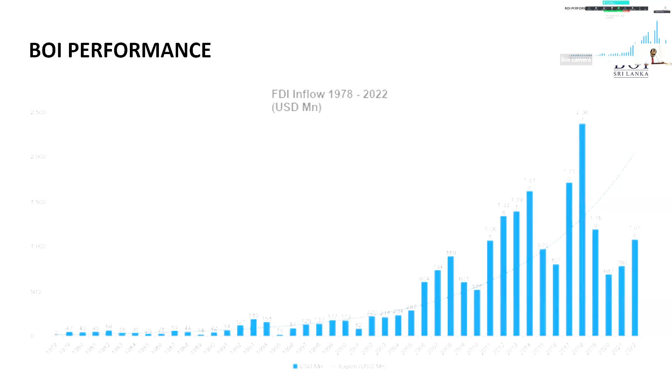You can see in 2018 only we had 2.3 billion USD. Why? Isn't that a miracle also? There was something special for that. That is the year we had this Hambantota HIP transaction with the Chinese government. So then we had 1.3 billion came in 1 year. Other than that, basically it's 1 billion USD investment inflow.

So then exports annually, about 2022, is 9.4 billion USD, and we are connected with many countries. Majority of our exports are textile, and from a country point of view, industrial exports are 89%, which are from BOI companies. So then we are doing really well, but still we can see majority is from textile and garments.

So then are we in a position to continue with the textile and garments? Because it's 5.5 billion of our total exports, we have to change a strategy. We have to see what are the opportunities that we can excel in, provincial wise, area wise, category wise, and market that to the export market. So that's what we are working on now.

The reason is automation has come up now. A lot of operations have been automated in zones, especially in Katunayaka and Biyagama, major zones. We don't have much employees there. Now these labor-intensive projects have been shifted to remote areas. A lot of garment industries we have in Vavuniya and other areas in the northern province, and also in the remote areas of the country.

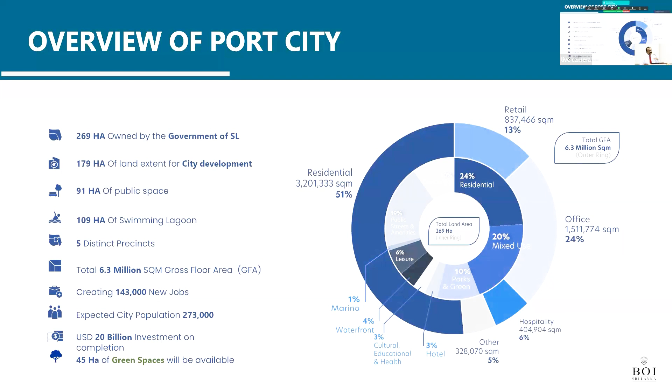A lot of projects are now in progress - 5-6 projects are in the pipeline, and 3 projects have started construction. This is how the area has been demarcated, with a total area of 269 hectares. I'm not going to talk about that too much because all the details are available on the web, but you can see whether you can connect your friends to this Port City area.

If we talk about the Northern Province, since our lady already explained the geographical information about this area, I don't want to repeat that, but let me emphasize one factor - the contribution to GDP. That's where we have to focus, Mr. Vijayaratnam, because if we take the contribution from Western province, it's 39.1% of GDP, but if you take Northern, it's just 4.7%. So that's the disparity. This is where we have to focus, see the opportunities and resources, and come up with our development plans together. Then we can reach at least 10-15% in a few years.

Like the Northwestern and Central provinces, if we can go up to at least 10%, that would be much better than what we have today. As the UDA team mentioned, we have a good network - electricity supply is good and communication is excellent. We know this because we've been at university with Jaffna Peninsula students, and they were highly skilled, dedicated people with good literacy and capacity for absorbing new technologies and capabilities. Rail transport isn't great, but we have connectivity, and harbors and airport facilities were also mentioned by UDA.

Every business aims to be leaders in their industry. Guidance by another leader makes the journey smoother. Setting trends is easy with the right infrastructure, and being in tune helps lead your business forward. Using cutting-edge technology keeps you ahead, and why not lead the pack? Lead the way with a way that's all connected. Transform your business with Dialog Enterprise. As the leading ICT provider for enterprises in Sri Lanka, we have the technology, expertise and island-wide presence that has made us leaders, and we can help you lead your industry to the future today. Dialog Enterprise.

For over 4 decades, we have been designing and building reliable construction solutions that a whole nation has grown to depend on. International Construction Consortium Private Limited has been innovating engineering solutions that have shaped the local construction industry for the better, to become more sustainable, efficient, and accessible. In Sri Lanka, where we're based, our name ICC stands for Solutions That Builders Can Trust.

With our latest innovation, prefabricated, pre-finished volumetric construction, PPVC technology, we're now set out to change the local construction industry forever by providing faster and finer construction for your building needs. Using PPVC will drastically reduce construction time, since the majority of the structure is produced at the factory.

The module production process can be done simultaneously at the factory with the construction of the foundation on site to get the maximum time benefit. Our team ensures that the modules are produced under controlled environment conditions to make sure that the final product complies with the best quality standards. This entire process improves the productivity of construction by 40% in terms of manpower and time saving, depending on the complexity of the project.

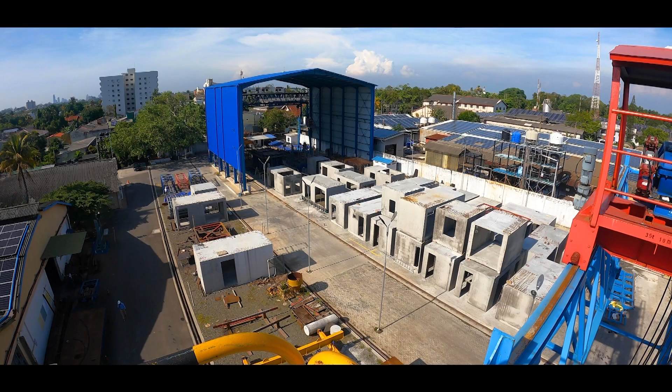Our modular building solutions are ideal for high-demand projects where scaling your labor and resources efficiently means everything. From apartments, executive accommodations, hospitals, and commercial buildings, whether major-scale or an intimate passion project, this modular solution by ICC wins you time.

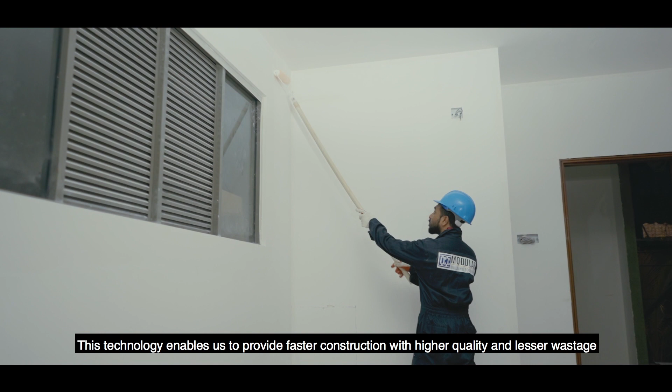ICC has been the innovative solution provider to the Sri Lankan construction industry, and we are very proud to be the only contractor to introduce this volumetric construction for the first time in the South Asian region. This technology enables us to provide faster construction with higher quality and lesser wastage.

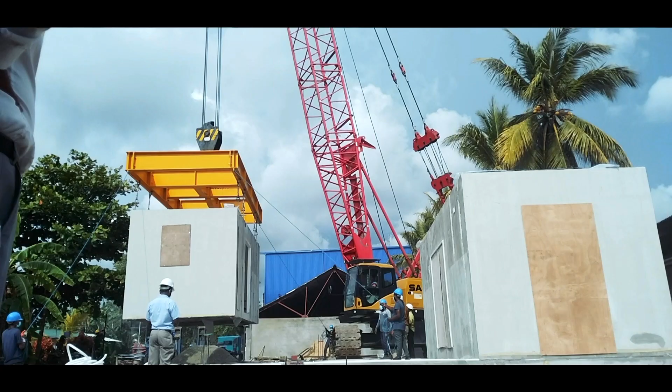Our intention is to introduce this technology to local as well as international markets, from which our clients will benefit in many ways. In this industry, where time means money and efficiency is the name of the game, ICC Modular Building Solutions gives you the confidence to move things forward, knowing that you can build mountains with only morsels of time.

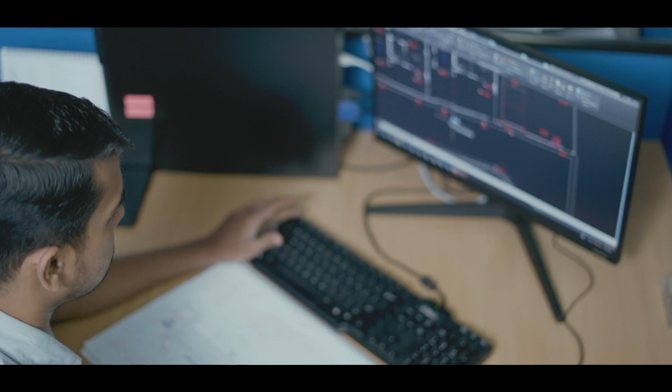I think ICC has made a bold and timely decision to introduce PPVC technology to the local construction industry. I have been involved with this project from its inception, especially with respect to selection of construction materials, evaluation of the structural performance and the construction process.

Extensive tests were carried out to evaluate the performance of the material and the entire construction process, including casting, finishing, transporting, placing and connecting the modules on site. I must congratulate ICC for the successful completion of the first ever modular building in Sri Lanka, in par with international standards, and I am confident that the introduction of PPVC technology will revolutionize the construction industry in Sri Lanka.

This solution is not just for Sri Lanka or even South Asia. For construction companies all over the world, working with ICC modular construction options gives access to durable, lightweight and easy-to-handle solutions for their next project.

Thinking modular is thinking efficient, it means thinking scale, and approaching construction with the sensitivities of time and labor of the business in mind. That's why we think it's the future of construction, and we can make it happen for you.

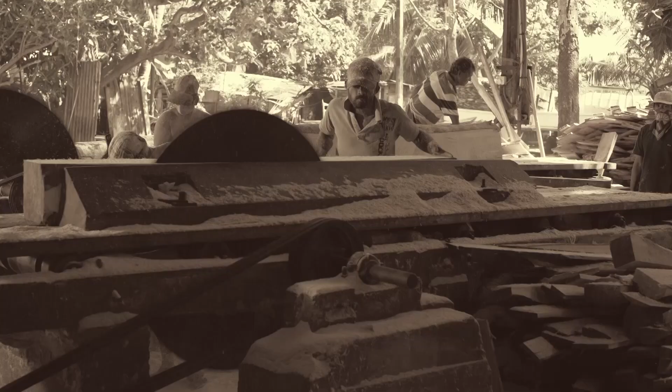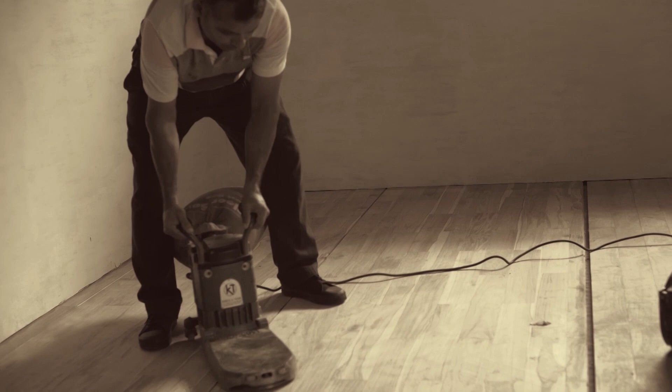In the past, installing timber floors involved sourcing wood, finding labor to treat the wood, and subsequently labor to install it. This was both a costly and time-consuming process. Today, that process has been revolutionized, resulting in a floor that is the highlight of your home and highly recommended by the experts.

The journey of these floors starts with us at the timber flooring facility in Bandaragama. Standing on 2 hectares of land, our factory, which consists of 3 buildings, a drying facility and a treatment plant, is changing the game by taking production of timber flooring systems in Sri Lanka to the next level.

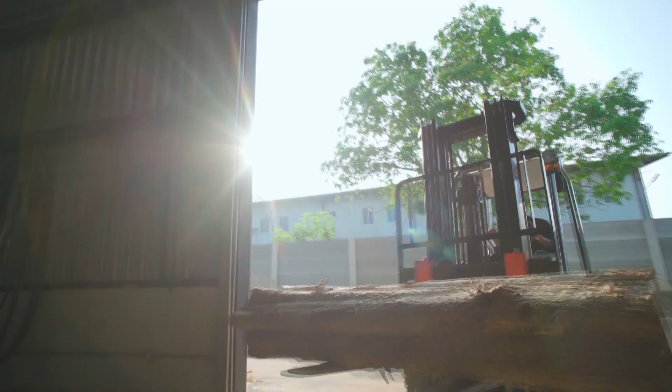The result is high-quality, standardized timber floors that are ideal for both local and international markets. Conforming to European standards, we create these fine floors with our state-of-the-art machines.

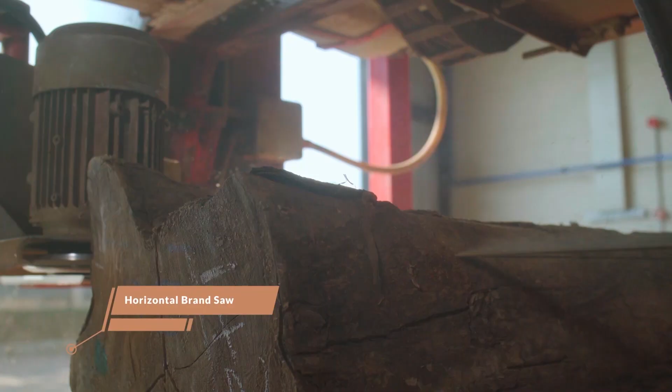Manufacturing begins with the primary process of sawing. The selected logs are sent through 4 specialized machines, which saw, edge, rip, and cross-cut the timber to the necessary size specifications. Next, within our treatment facility, chemical pressure impregnation treats the timber, ensuring it is resilient to termites.

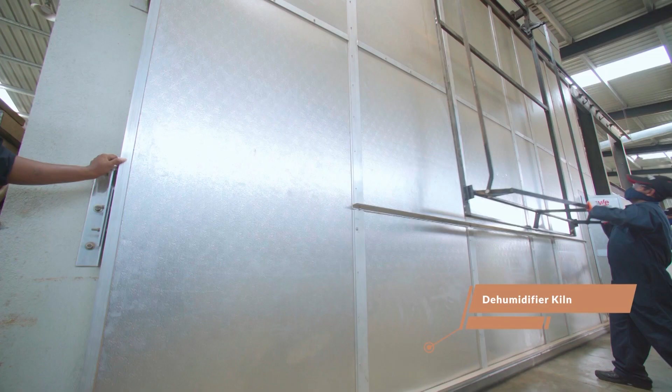Once the timber is treated, it is dried in an ultra-modern dehumidifying kiln that reduces the moisture of the wood between 8 and 12%.

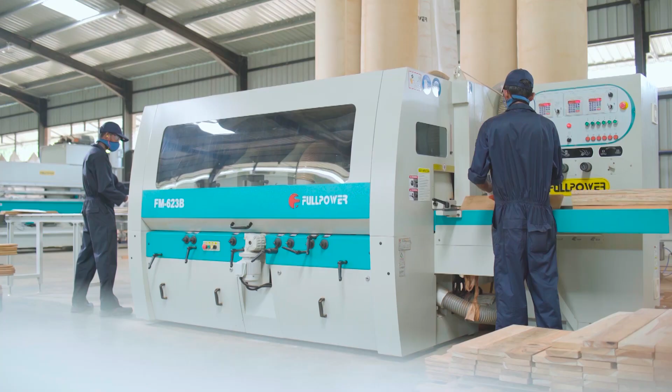The seasoned timber then moves onto our processing unit, where secondary sawing takes place. It is at this stage that planing, tongue and grooving, cross-cutting, tenoning and heavy-duty sanding occurs. At the finishing stage, the processed timber is sanded, cleaned, stain brushed, sealed and UV cured.

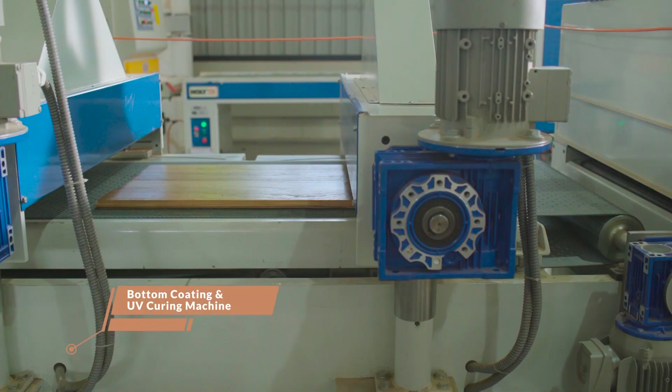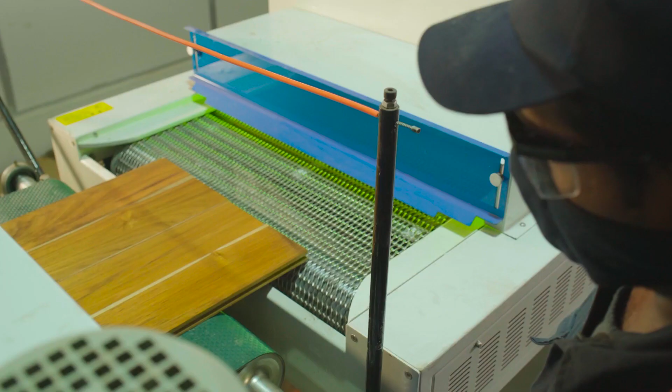The result is a floor plank with a finish of either gloss or matte, depending on your requirements, which is ready for immediate home installation.

Our product range consists of flooring made from locally sourced teak, paramara and kumbuk, as well as oak, pine and cypress imported from Europe. The quality of our product is of utmost importance to us, and we adhere to stringent quality controls at various stages of the manufacturing process.

Being mindful that our industry is dependent on the environment, we source our wood from the State Timber Corporation. We also take measures to replenish and safeguard our forests by setting aside land for the continuous growth of new trees, our raw materials in the future.

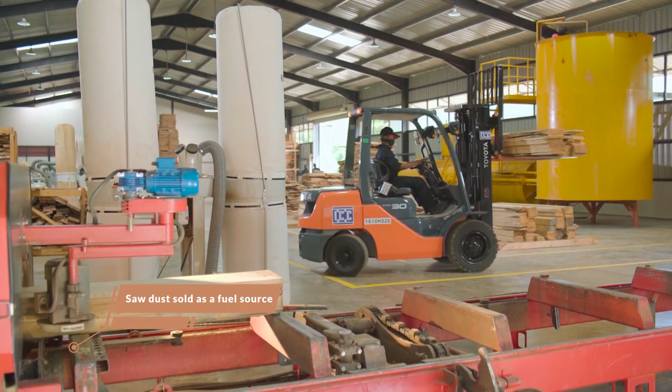In addition, we recycle our manufacturing waste materials and take measures to ensure pollution from our facility is at a minimum at all times. Our finished product is manufactured to make installation hassle-free.

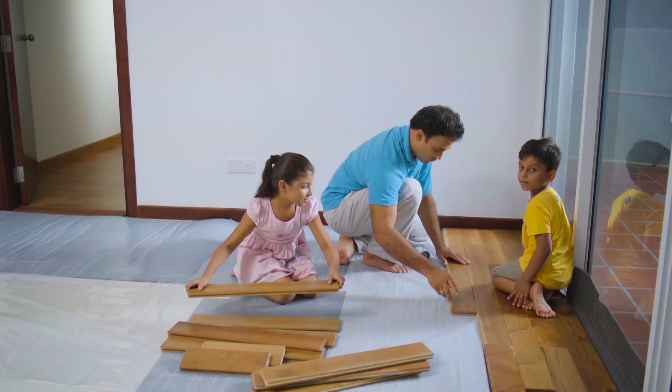We utilize the revolutionary Elastilon laying system, where the wood is pressed on an elastic adhesive, which makes installation simple. Our timber floors are available in a range of colors and are convenient to install, providing a ready-to-fix product from one company that architects can recommend with confidence and homeowners can appreciate for many years.

We are moving Sri Lanka's timber flooring industry to the next level with our timber flooring facility.

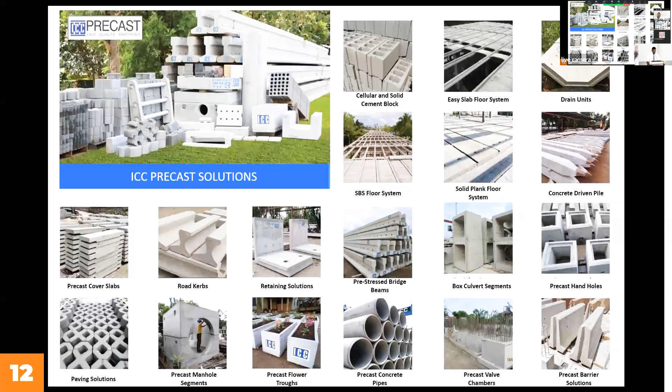Let us move into the precast background of ICC. In 1996, we started the manufacturing of precast elements, which are precast beams and columns. Those are still popular in the market.

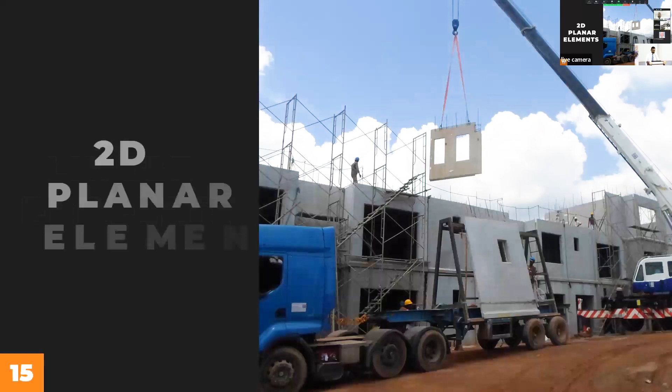In year 2000, we introduced another new technology to the industry: 2D planar elements, which are precast wall paneling systems, both load bearing and non-load bearing.

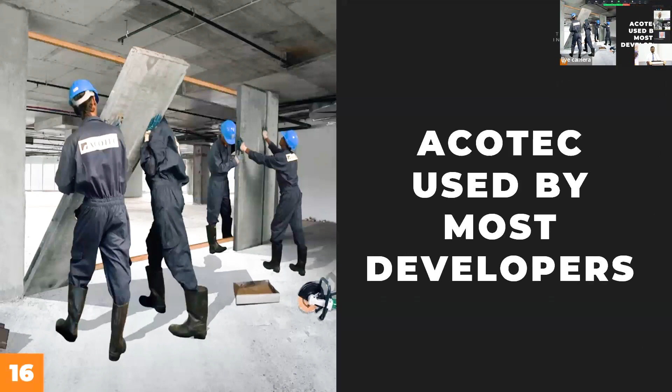In year 2015, we introduced another new innovation to the industry: one of the most popular 2D precast elements, the Acotec wall paneling system, which is preferred by most developers for their projects, especially in Colombo. Almost all the high-rise building contractors have used our 2D precast elements, the Acotec wall paneling system.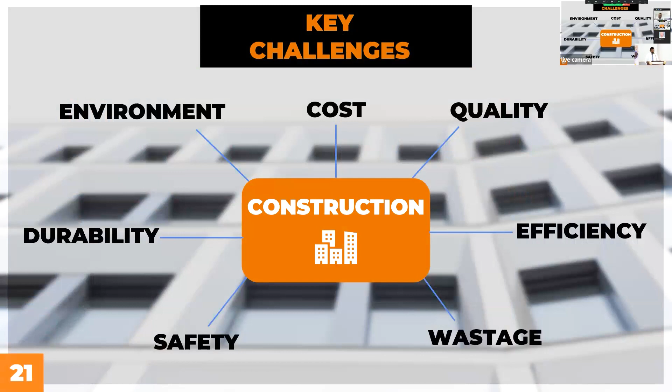In year 2021, we were able to introduce 3D modular building system for the Sri Lankan construction industry. During the COVID-19 pandemic, we had to re-evaluate our approach to various construction challenges as shown on the screen. As a result, we were determined that investing in cutting-edge technologies was the best solution to address these issues effectively.

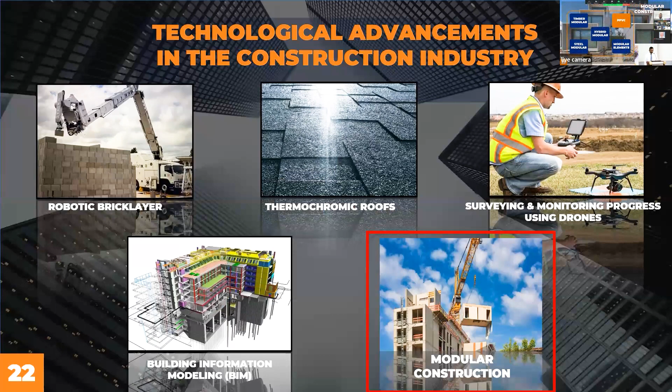After analyzing the current technology landscape, we decided to invest in modular construction technology as shown on the screen. There are several types of modular construction techniques in the world, but we selected PPVC technology as the most suitable modular construction methodology for the Sri Lankan context.

You may wonder what PPVC is. PPVC stands for prefabricated, pre-finished volumetric construction. Let us see the advantages and benefits of PPVC construction technology. You may be able to save up to 40% of the time, and you can see many more benefits on the screen.

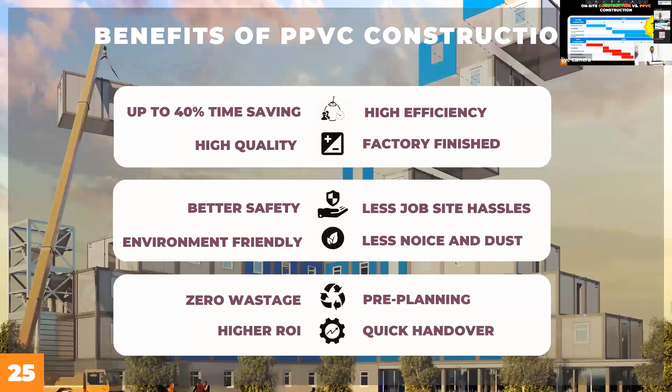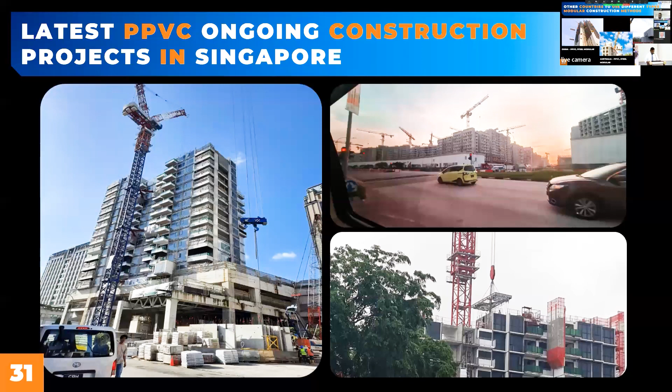You can see some ongoing projects in Singapore. Apart from Singapore, this PPVC technology is used in China, Australia, and South Korea. They were using this technology for their mega development projects.

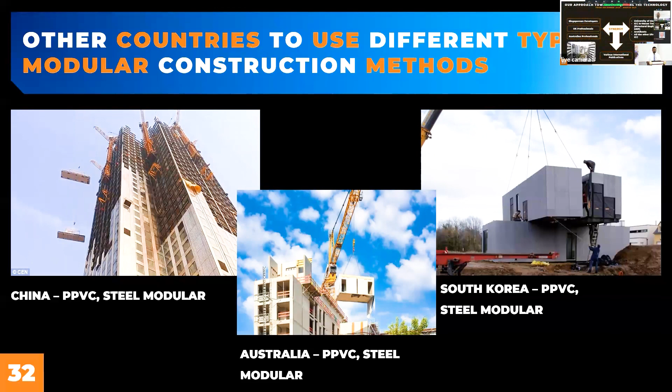During COVID-19, we had to work harder to acquire this technology due to travel bans and curfews preventing us from meeting professionals in other countries. But ICC's in-house team collaborated with professionals from Singapore, UK, and Australia online, and referred to international publications to transfer this technology to Sri Lanka successfully.

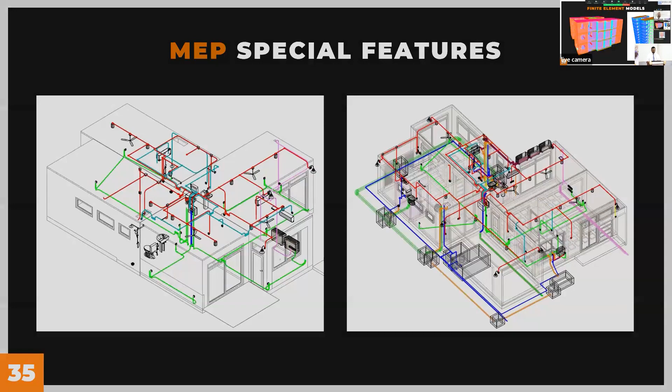The PPVC modules use software such as Revit in order to pre-plan all MEP services and fixtures. The structure is also modeled by means of finite element models to optimize the reinforcement requirements. The initial modular design by ICC was approved for a 14-story building by Dr. Chintaka Mallikarachchi, and reviewed and endorsed by Professor SMA Nanayakkara of University of Moratuwa.

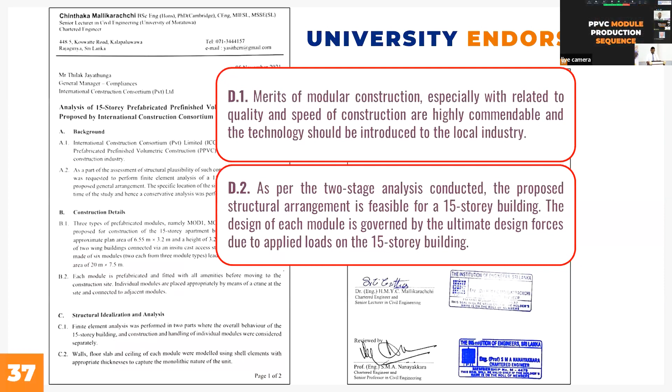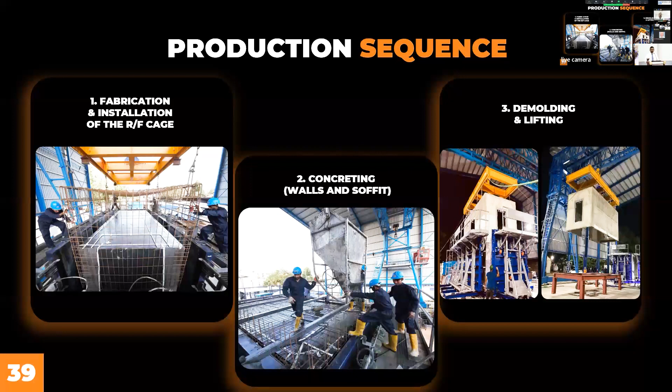Let us see the production sequence of PPVC modules. On the left side, you can see rebar fixing is going on. Once you complete the rebar fixing, you may do the concreting of 4 sides and the ceiling slab. Once you complete that, you may de-shutter after 24 hours, and it should be transferred for floor concreting.

Once you complete the floor, it should be transferred to the finishing yard. From there, you can do the finishing work, civil and mechanical, before transporting to the yard. Once you transport to the yard, it can be erected on completed foundations.

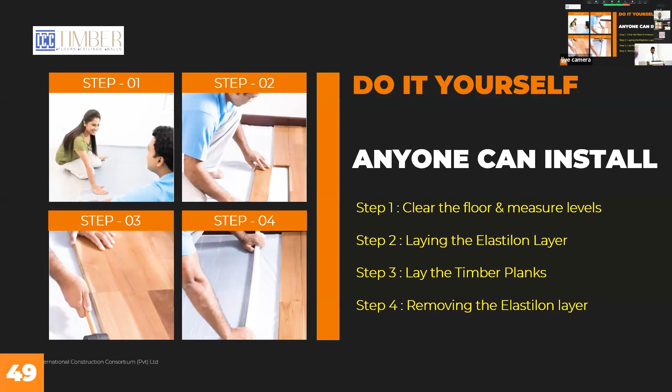Our next exploration is the ICC timber solution - this ICC pre-finished timber flooring. This flooring system can be installed by anybody; it does not require skilled labor, by adopting the 4 steps shown on the screen. Time-wise, this is 5 times faster than traditional and conventional timber flooring systems. It does not require any patterns, painting, or sanding.

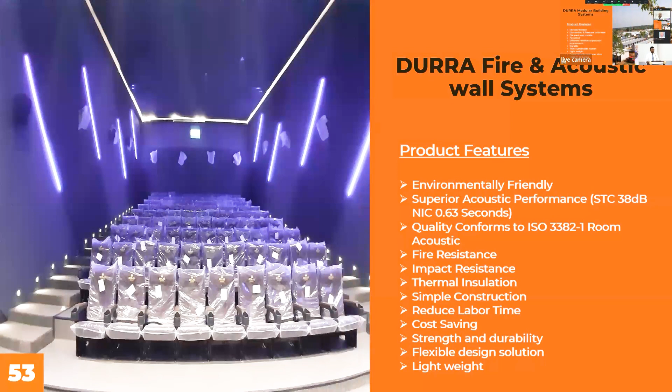This is the next exploration, called the ICC DURRA panel system. I think most of you may know about this one. It is a multi-purpose panel which can be used as a fire and acoustic paneling system. You can see some features on the screen. This can be used for modular building systems as well, and other building systems.

Ladies and gentlemen, as you know, the industry is very volatile and uncertain. Yet still, at ICC we remain committed to providing innovative solutions with competitive pricing. We offer products with high quality, and we are a financially sound company. Therefore, as introduced by UDA and BOI, you may join hands with us for your next development, use our products, and get more benefits and more profits by using our products.

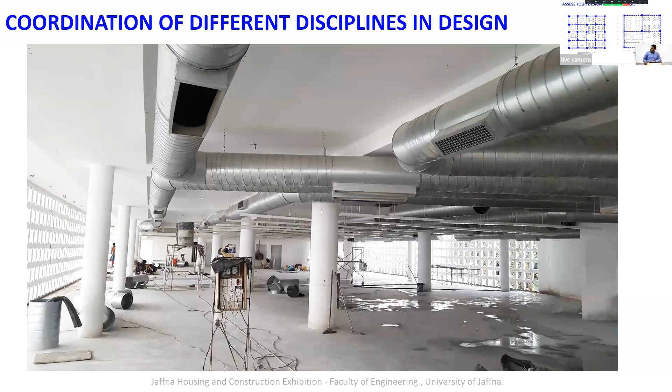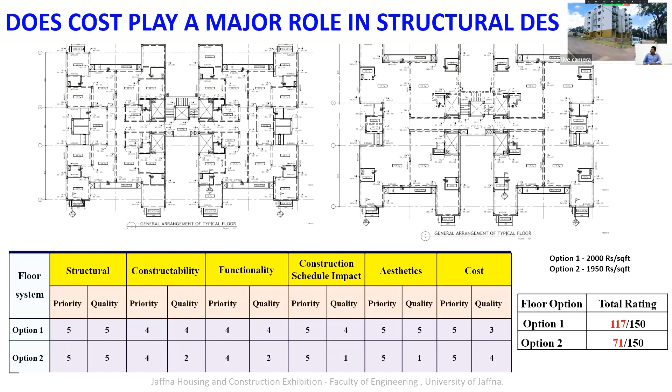This study we explained through what is called a decision matrix. We explained to a developer and convinced them this is the most optimum one, and they adopted this option. You can see the building becomes very nice - there are no beams crossing the living areas and other areas, but still this is a cost-effective solution.

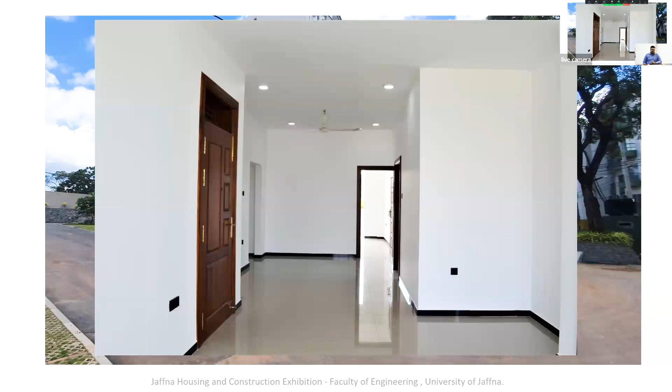This is another option for real world comparison. Normally, the option on the right side is commonly adopted in apartment construction in Sri Lanka. This is a 10-story apartment building, conventionally adopted by a developer, where you have many beams and columns located. But we have considered two other options, even without a beam in the middle.

You can see without a beam, we can reduce the reinforcement consumption to half if we design it properly and it is constructed by a qualified contractor.

What I am trying to say is, if you are a developer, before you start building, compare different possible alternatives with cost. Otherwise, we will have a misconception that a minimum slab thickness gives the minimum cost. That is not so.

And I was talking about concrete construction, but not only concrete. Now, with the development of different technologies, we can use composites. This is a steel concrete composite solution already adopted in Sri Lanka. You can see a 15-story building designed and constructed fully with steel concrete composite, which can increase the construction speed as well as allow longer spans.

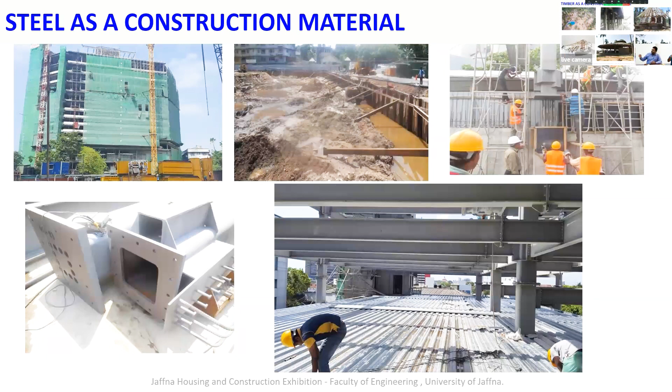Timber is one of the sustainable materials we can adopt. This is a 5-star hotel in the Eastern Province where timber is used. To design this project, we mostly used ancient design concepts, like how connection mechanisms were used in old church construction. We study from existing methods and develop and apply them to real projects.

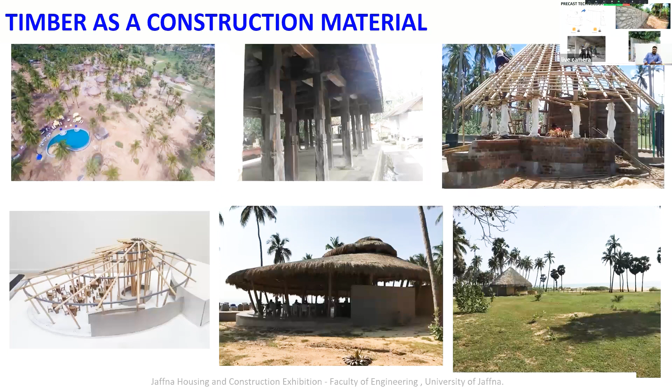Precast was already discussed by the presenter from ICC. Precast is a current technology that saves a lot of time and can improve quality. It is not new to the Northern Province; contractors are already adopting it, but the awareness among developers is still fairly low.

You can see a boundary wall. Normally, when constructing around 2,000 to 3,000 foot long boundary walls, going for a precast solution may save a lot of time as well as improve quality. Not only boundary walls, you can apply this to other elements as well.

This is a project in Singapore, around a 20-story building, where we helped with a modular PPVC solution, as the presenter from ICC explained. The 20-story building is made up of different modules already fabricated and finished in the factory. Even the bathroom fittings and everything are fitted and transported to the site and placed.

But with this, we have several technical challenges, like how the modules are joined and how this will perform under lateral loadings. We can solve that through analysis with recent developments, and improve construction speed as well as quality. As the presenter from ICC explained, Sri Lanka is not far from this; the future will involve these kinds of PPVC solutions.

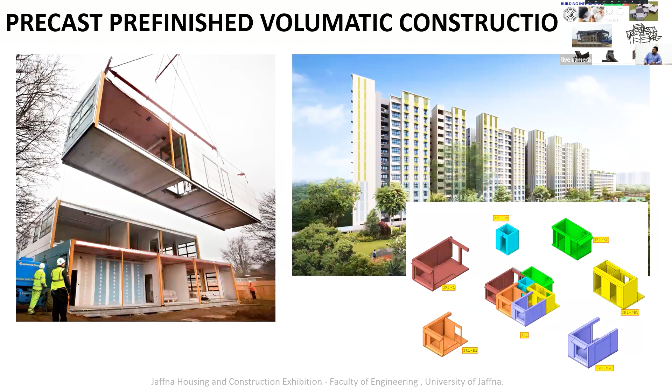When we come to building information modeling, unlike early days, now most projects can be visualized on a computer as a digital object.

This is a complex structure built in Colombo Port City, a pavilion structure. You can see the complicated connections there. Everything was modeled on a computer and visualized, because the accuracy of the fabrication needs to be at the millimeter level. Then when we come to the site, it is much easier, and we can do all the coordination between different disciplines to solve problems in the early stages of the project.

This is another complex development in the southern region, where the building is very complex, because modern 5-star and 3-star hotel developments tend to be more complex, especially when the geometry is shaped by the architect to give the most aesthetic view, making the structural solution much more complicated. But with technology, we can solve it.

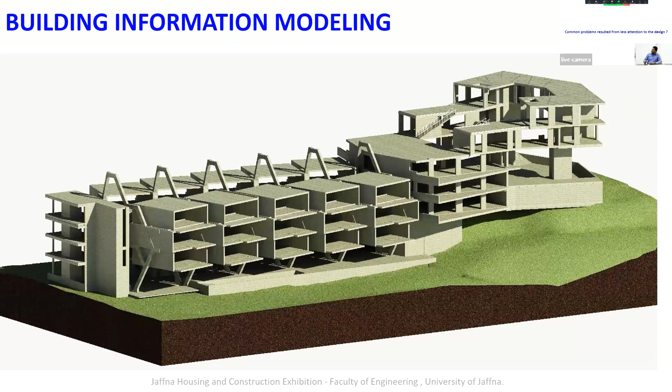These are some current developments, but I will also show you some common problems we face if we pay less attention during the design stage. This is one project I want to show, among investors, to give some awareness.

Normally, for low-rise buildings, there isn't much regulation for approval; this is currently still in a developing stage. Normally, drafting people develop the drawing and get the approvals. This is a 3-story building designed by a client in the Northern Province, and they have already built a single story.

You can see that there were certain cracks. After that, they were discussing what to do. We exposed the foundation and saw that, as it is a small building, in the drawings, the foundation thickness given was only 150 millimeters.

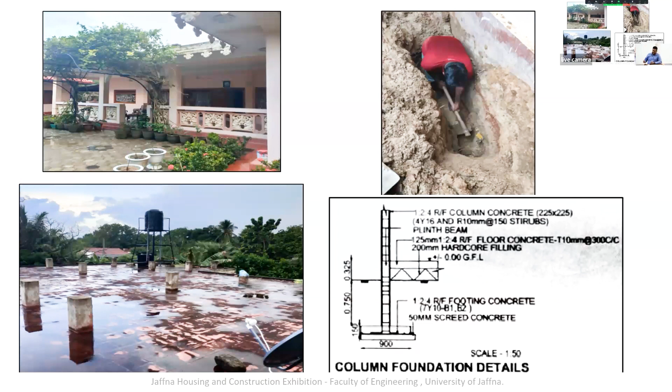The floor thickness is also 5 inches, and the foundation also 6 inches. Most of the time, when you come to low-rise buildings, developers are more concerned about the slab - whether we put more reinforcement and whether we have adequate thickness - but they don't worry much about columns and foundation. After we explore this, when you want to do strengthening to avoid problems, the cost is much higher than if we hire a professional during the design stage. Therefore, even if it's a single story or 2-story building, it's better to have a professional engaged during the design stage, so you have big cost savings compared to later improvements.

I can show many examples, but this is another one. You can see a development where the developer designed a garage with a limited clear height so his existing car could be taken in. But later, when he tried to upgrade the car, he couldn't take the vehicle in because of the limited clear height of the beam. We don't need to demolish it - we can do improvement to remove that beam with some alternative solution, but the problem again is cost. When you come to do this at a later stage, it costs more. That's why I'm telling you, if you clearly study during the initial design stage and clear the problem, it will save a lot of cost.

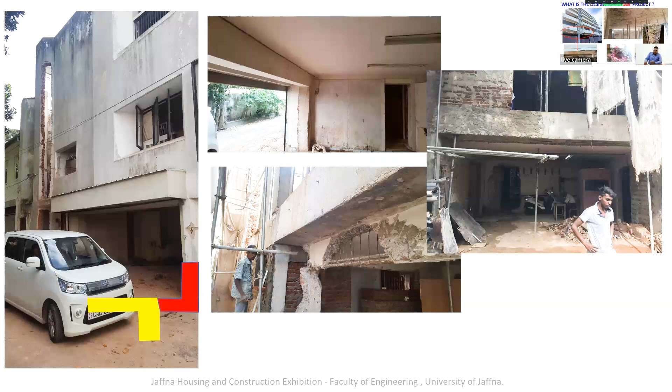The next issue is durability. Most of the time developers are concerned about how long our building will last. Since we are very close to the shore line, when you use concrete, the quality has to be properly controlled. If you don't do that - if during concreting you don't control the amount of water we put - at a later stage, as you can see in the picture, there will be problems of corrosion as well as spalling and many other issues. After facing this kind of issue, rectification is much costlier than if we do this properly at the beginning.

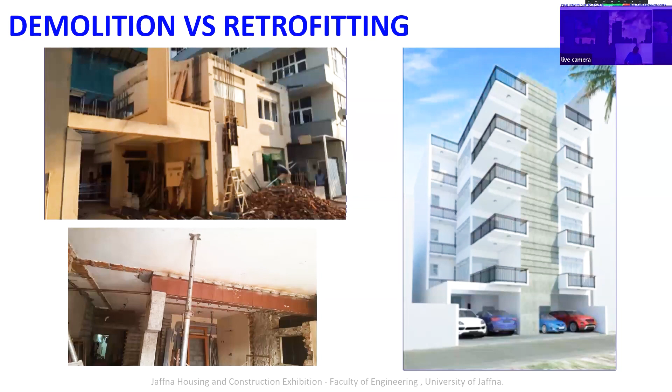If we compare recent developments in construction, every year there's an update. If you compare a building designed towards the left side around 10-15 years ago to a recent building design on the other side, maybe the concrete strength used is 2 times - maybe 50 MPa strength was used there, here 100 MPa strength is used. The technology - all the partition walls are Akota panels, which saves a lot of weight.

When that kind of development happens, as engineers the challenge is buildings becoming very flexible, and they tend to move with the wind. So knowledge-wise and research-wise we also have to upgrade to solve those problems. I'd like to highlight the importance of research as academics to solve this kind of problem. This is a real project in Colombo.

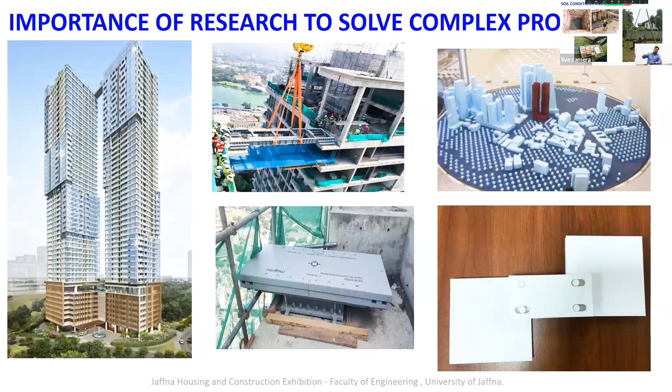Then when we come to soil parameters - when designing a development, we have full control over the superstructure, but when you come to the substructure, there are a lot of uncertainties. In some areas we have very weak soil like peat soil, and in some areas we have expansive soil - even in the northern province, in some areas we have expansive soils, in some areas peat soil. But developers are very reluctant to do soil investigations. We should be able to educate them on the importance of that, because otherwise, at a later stage, we will have a lot of problems.

Considering this, from the University of Jaffna, in one of the undergraduate research projects, we looked at the Northern Province, where there are many soil investigations carried out by various government projects and private clients. We collected data with the support of other developers and have gathered borehole locations from almost all around the Northern Province. With these details, we are trying to develop a GIS map where, before doing soil tests during preliminary design, we can get some idea of where the problematic soils are. These are some of the research works we carry out at the university.

With that note, I will invite Dr. Chandima to continue with the presentation.

Basically, in my presentation, what I would like to say is that our construction industry has many challenges, but with the knowledge of the current construction industry as well as the university—even though Jaffna University is a very young university—we are very encouraged to work with contractors and developers in a collaborative manner to help them with respect to knowledge transfer. Thank you.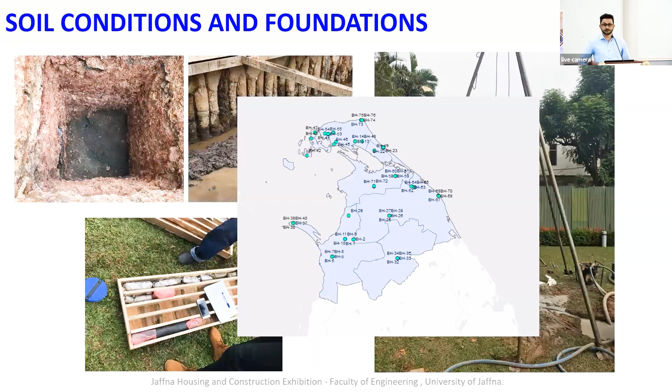Thank you, Kiripuran. So you had a wonderful ten minutes about how to make your designs efficient. Now I'm going to take you into a different side. We've been talking about tall buildings, large buildings—everything large and tall. But after a few years, what will happen to these buildings and infrastructures? They will end up as waste. So what are we going to do with this waste? When we talk about a sustainable future, we need to think about how to reuse and discard this waste, as well as how to secure available resources for the future.

So I will take you on a small tour of the undergraduate projects we have done at the university level—these are students' works. I will present this on behalf of the students, as well as the supporting staff and the university. The topic is transforming industrial waste into innovative solutions. This presentation will include only a few studies due to limited time.

As you're already aware, the United Nations Development Program has listed several goals for a sustainable future. Goal number 12 is sustainable consumption and production. For that, we need to take steps to reduce the use of available resources, reduce waste, and reuse waste in an innovative way. Under that, waste reduction and recycling is one of the major steps we can take toward a sustainable future.

When we talk about waste reduction and recycling, we can look at it on different levels—reducing the amount we use, as well as reducing the energy we spend. Not only at the household level, but we can also reduce the energy used for different advanced techniques, including during the construction stage.

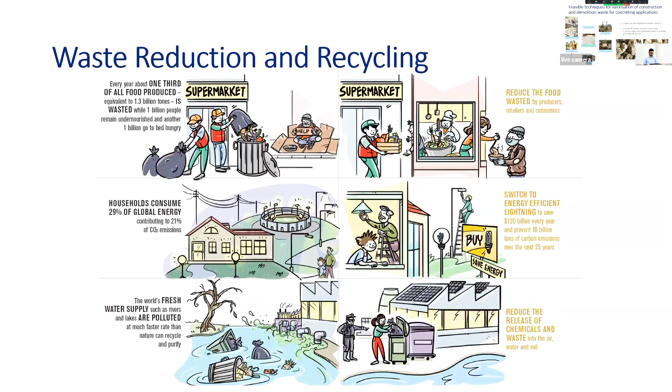I'm going to go through a few studies one by one. The first is about a feasible technique for reusing construction and demolition waste—basically concrete waste—to make recycled concrete aggregates. The problem with recycled concrete aggregates is the interfacial transition zone, which is weak—the phase between the original aggregate and the mortar. We have different advanced techniques, such as thermal treatments, mechanical treatments, and chemical treatments, to remove this adherent mortar. But using these advanced techniques creates additional crack propagation in the transition zone as well as in the original aggregates.

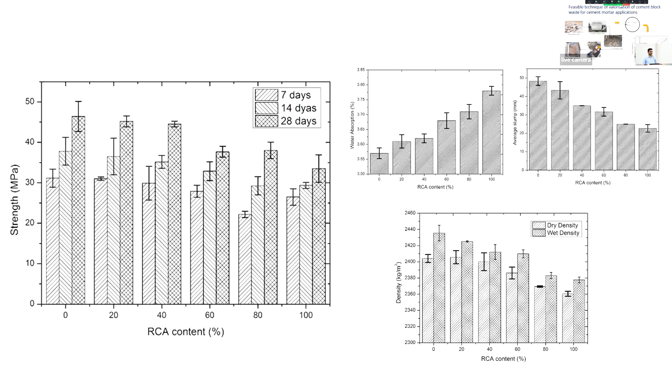So these are some findings about the mortar properties they developed, comparing them with normal mortar. Here also the main property is strength - up to 40%, we can replace normal aggregate using these recycled aggregates. This means we can save the resources which are available, because we have limited resources at the moment. So we need to think about saving the available resources as well.

In addition to that, several other properties: compressive strength, dry and wet strength, density, flexural strength, water absorption and porosity. To some extent, like 20%, you can see enhancement of the properties as well. So most of the mechanical properties have enhanced with these recycled materials.

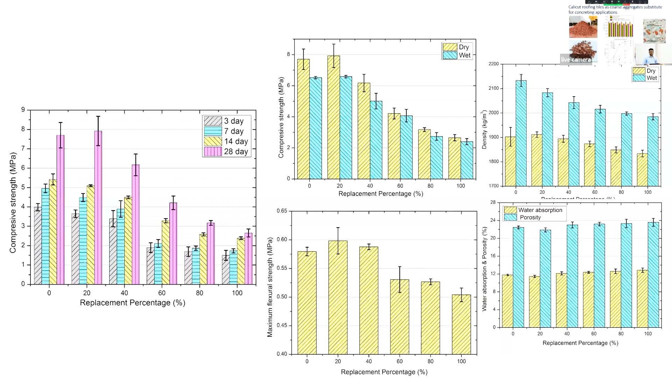Another one is calicut tile aggregate. This is one type of waste that is accumulating at the moment, because people are reluctant to use calicut tiles now, and they're replacing calicut tile roofing material with different advanced materials like asbestos, and other roofing materials, considering the weight of the roof as well as leaking and other problems. So what we can do with this waste is make it into aggregates, to replace normal aggregates.

The first one shows the density - how the density varies with the percentage. We can see that the density is going to be reduced because calicut tile aggregates have lower density compared to normal aggregates. In addition, workability is also reducing, but what we can do is use different admixtures to increase the workability.

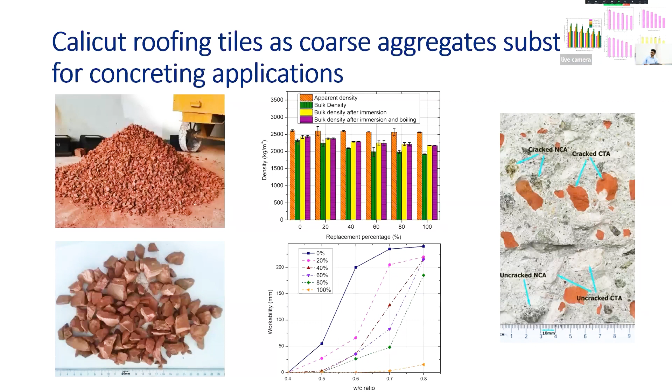The corner figure shows the crack surface of concretes. As you can see, normal concrete also cracks, and normal aggregates also crack, and calicut tile also shows cracks. But when comparing the fracture between normal aggregates and calicut tile aggregates, calicut tile aggregate shows higher fracture, because the mechanical properties of calicut tile aggregate are a bit low compared to normal aggregates. But anyhow, we can use these calicut tile aggregates up to some level, up to nearly 40%, without significant change of the properties.

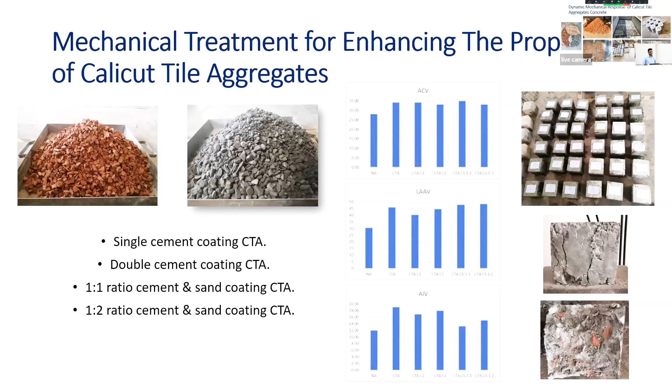Another research the students have conducted: we can use this concrete for normal industrial flooring as well as concrete pavements, like the side walls of roads and other places. These industrial flooring and road pavements are subject to dynamic loads, so we need to know about the dynamic behavior of this concrete as well. One group of students is now investigating the dynamic properties of the concrete, to determine up to which limit we can use this Calicut tile aggregate concrete for industrial applications.

These are some figures. The research is going on now.

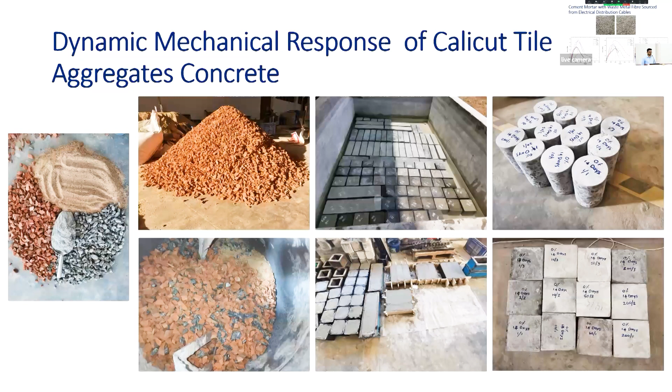Another one is cement mortar with waste metal fiber sourced from electrical distribution cables. In the electrical distribution industry, when the length of a cable is not up to the required limit, they discard it. So what they have done is collect those discarded cables, take the metal part as a fiber, and use it as fiber in cement mortar.

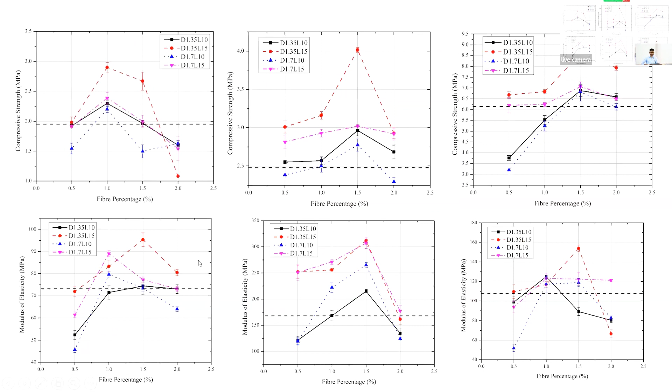These are some other comparisons of the main properties, the compressive strength at different ages, and also the modulus of elasticity. As you can see here, the reference mortar is shown using the dashed line, and the majority of these mortars show enhancement in their properties.

Another one is cement mortar system with textile waste. The textile industry is a major industry in Sri Lanka, and they discard the pieces cut during fabrication while preparing garments. Normally they burn these at the end during discarding. So what we have done is develop and synthesize fibers from this waste, and used it as a fiber addition for mortar as well. Here also we observe some positive outcomes with this addition of textile waste fiber.

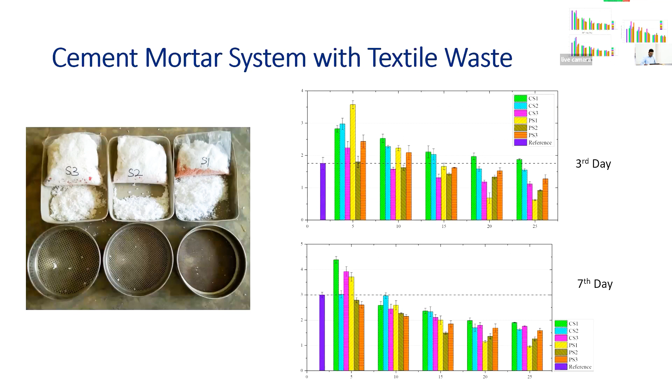The properties may differ based on the type of textile used. Here we mainly use cotton-rich textile as well as polyester-rich textile, since the industry uses different types of textile. Recently I got to know that Moratuwa University has fabricated a cement block with the addition of this textile waste, and they have even obtained a patent for it. So there's always a way to use this waste in an innovative way.

In addition to that, communication industries are facing a problem of how to manage communication cable waste, because these communication cables are made of different types of material. The first figure shows the communication cable waste, and the other figure shows the segregated waste from this communication cable waste. Students have used this segregated waste in fiber form in order to increase the properties of concrete.

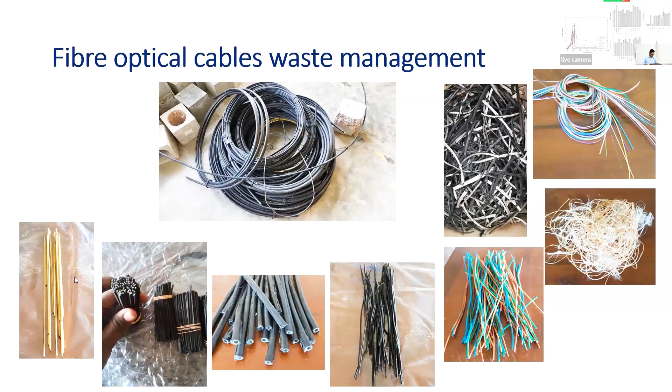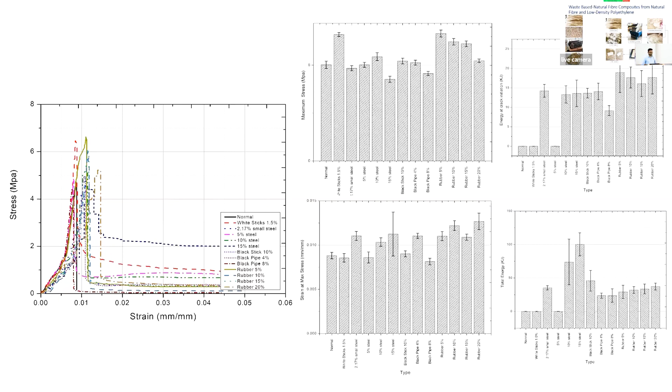In addition to that, another area students have investigated is waste-based natural fiber composites made from natural fiber and low density polyethylene. They used different types of fiber: banana fiber, rice husk, palmyra, sawdust. These are some selected fibers used. The waste natural fiber and the waste low density polyethylene are taken from industry, used to cover and wrap equipment and other things. They used simple techniques, a shredder machine as well as hot press and cold press, to prepare this 100% waste-based composite material.

These are some of the selected properties, as you can see the stress-strain diagrams. We can have different proportions and different products based on requirements, whether it's a flexible one or a rigid one, whether it should have good strength or low strength with higher energy absorption and higher flexibility. These are some properties: Young's modulus, maximum stress, and several others. These are some of the products they have manufactured.

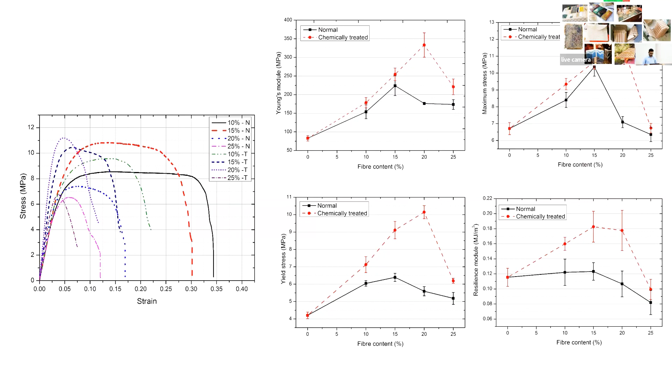In addition to that, there's another research going on for roofing tiles. We can use chemical treatments to enhance the properties, like alkali treatments. If we are using these as roofing tiles, we need to think about fire resistance as well, which we can enhance by adding some other chemicals. Research is already going on, and some part of it is already completed. The last figure shows toilet blocks covered with these manufactured roofing tiles, which are 100% waste.